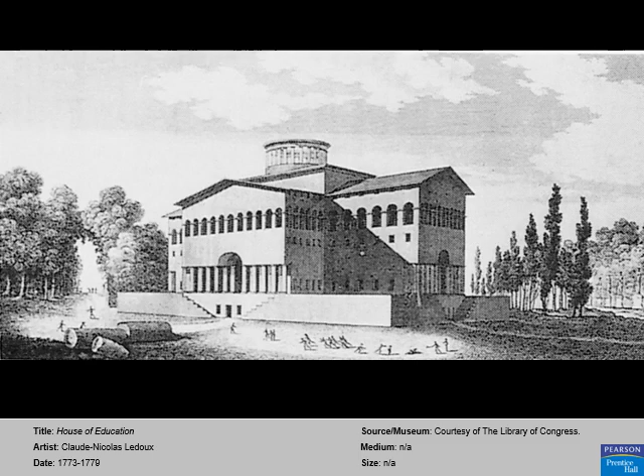This lecture will examine the many facets of our built environment, its evolution from Greek temples and the Anasazi cliff dwellings to skyscrapers and postmodern designs. The look of our buildings and communities depend on two different factors: the landscape characteristics of the local site, which we call the topography, and the forms of our built environment as determined by the available technology. Both are factors that affect the way in which we build structures around us.

So again, you've got topography and technology. Topography is the characteristics of the land, and technology is the materials and the skill available to build things on that land. And both of those things are important to examine as we discuss architecture. Let's start with topography.

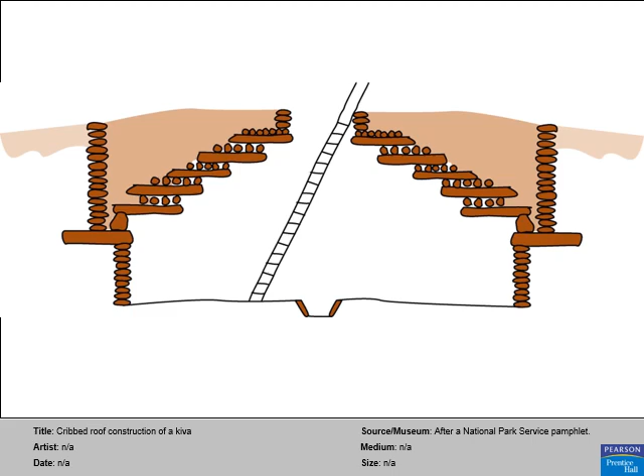While the cliff dwellings are a response to topography of the place, the structure of the kiva roof represents a technological innovation for the Anasazi people. The basic technological challenge faced in architecture is to build walls and put a roof over the space that they enclose, because essentially architecture is building shelter for humans. And there are two basic approaches to building walls with a roof.

Those two basic approaches are the shell system, and the shell system is one in which basic materials provide the structural support and the outside covering of the building. So in the shell system, like a seashell, the walls hold up the roof. That's one of the two basic approaches to building. The other system is a skeleton and skin system, which consists of an interior frame or skeleton which supports an outer covering, or a skin.

And we're going to talk about the shell system and the skeleton and skin system and how they've evolved over the years. In buildings several stories tall, the walls or frame of the lower floors must bear the weight of the upper floors. So again, in the skeleton and skin system versus the shell system, you've got different problems, which we're going to discuss as we move through our discussion of architecture today and the technology of architecture. But again, in buildings that are several stories tall, the walls or frame of the lower floors must bear the weight of the upper floors.

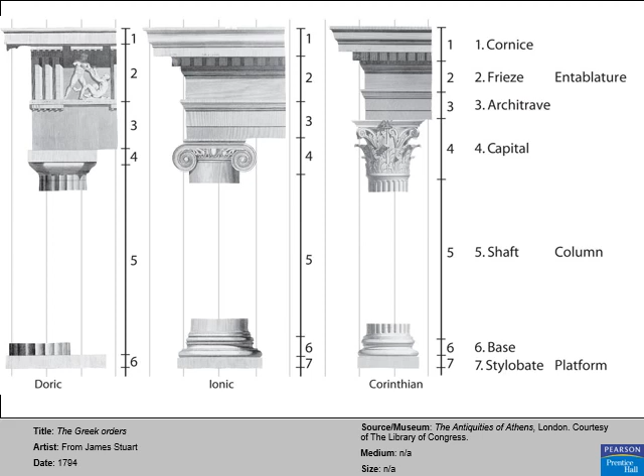In the old days, back 3,000 years ago, Greek priests would hold ceremonies inside. Actually, only in these very small temples, the ceremony and sacrifices would happen on the steps of the temple, and only the priests would be able to enter them to do certain rituals.

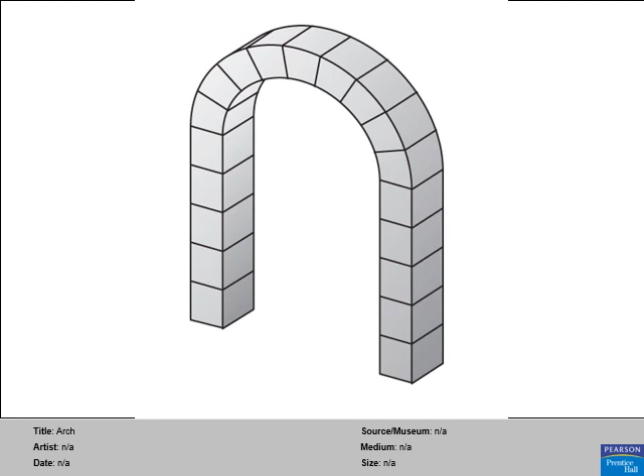And it's still standing, although it was built 2,000 years ago. I was there a couple of Easters ago on holiday with my family, and it is the most breathtaking thing. To think that an ancient civilization made it with no electricity or modern technology, and that not only does it still stand, but people still drive over it, is quite a testament to the ancient Romans' technology and to the strength of building with the arch. So, this is the arch. It's very powerful, right? It can span far greater distances with stone than the post and lintel.

Now, if you take a bunch of arches and stack them behind one another, you get a vault. You get a barrel vault. At top now you see an illustration, a diagram of a barrel vault. A barrel vault is essentially a bunch of arches that have been built behind one another. Below it we see a groin vault or a groined vault. And a groined vault is simply two barrel vaults that intersect at 90-degree angles.

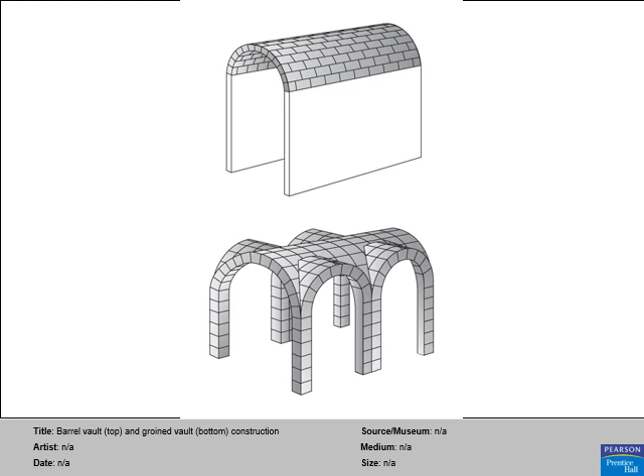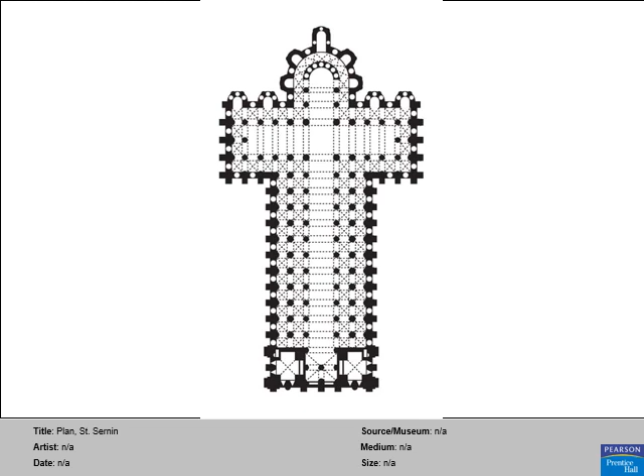But that story of Catholicism becomes part of the design of the architecture for Catholicism. So when you build a Catholic cathedral, you put that crucifix into the very floor plan that it exists.

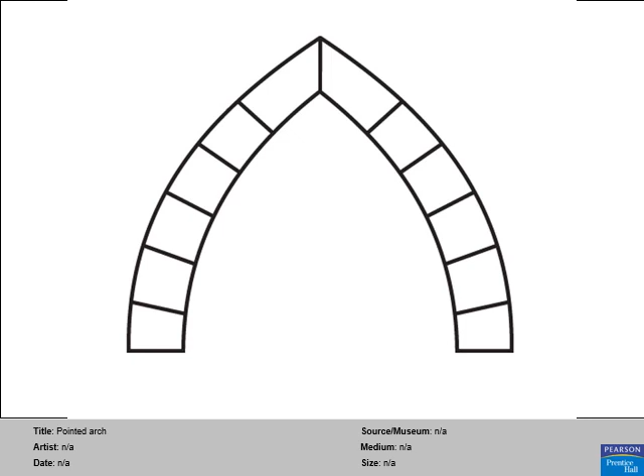The Gothic or pointed arch. Again, the advantage is it spans greater distances than the Roman arch. The most famous of all Gothic cathedrals is the Cathedral of Notre Dame in Paris. It is a Gothic cathedral, and the Gothic cathedral has lots of pointed arches in it.

But in order to aid in the spiritual goal of this beautiful Gothic cathedral, it was the intention of the builders to fill the walls with stained glass full of the narratives of the Old and New Testament to a mostly illiterate congregation below so they could see the life and times of Christ and the apostles, but also to fill the room with this colored light, like James Turrell's sculpture we spoke about in the last lecture, to give it this kind of ethereal, spiritual glow.

So to fill a masonry building, a stone building, with colored light, you need to fill your walls with glass. Well, glass is very beautiful, but glass is not very strong. You can't stack bricks on top of glass. So this Gothic cathedral with its Gothic arches and this high pointed situation, how do we make it so that you could have walls made of glass?

Well, what the Gothic architects and the builders of the Cathedral of Notre Dame discovered was this wonderful term called the flying buttress. And the flying buttress is literally a small tower on the side of a building that has kind of a half an arch that leans in like a helping hand, like an arm, and literally holds the wall up or takes some of the weight off the wall. So the Cathedral of Notre Dame is full of these flying buttresses, these kind of external supports and towers. I'll cut to the next image, which shows the diagram of that.

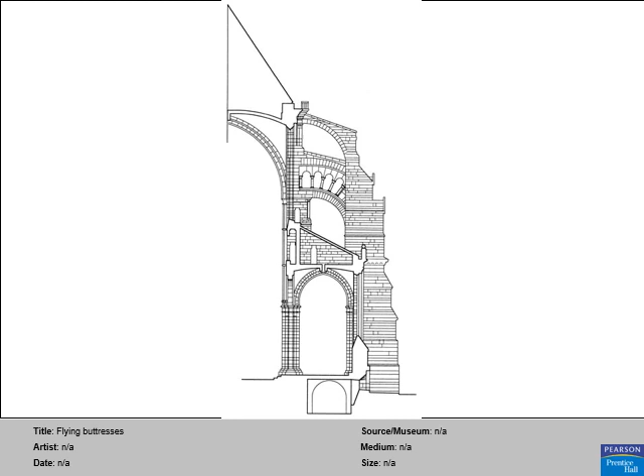So up until then, pretty much everything we've talked about was made out of stone. Stone with some brick and mortar cement, but really stone. And stone for a couple thousand years ruled the built environment. The technology was stone and perfecting stone. Wood was still used for some horizontal beams on some of those huge Greek temples. They would use gigantic wooden beams to span across the tops of some of them. But for the most part, it was all about stone.

Well, in the 19th century, cast iron construction becomes possible, and architecture is determined by the innovations of technology. Stone was there for so long, and then finally during the 19th century, iron, which had been known about for centuries, but was not really readily available until the beginning of the Industrial Revolution, through the invention of the steam engine and other mining technologies and other technologies that let iron and then eventually steel become available.

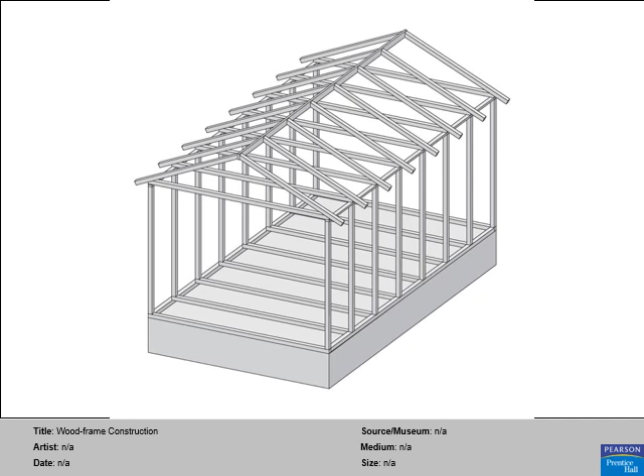We've all been in New Orleans during the rebuilding in a post-Katrina world, and you'll see building companies show up with these pre-made triangles for the trusses, and they'll just kind of stack them up and nail them together really quickly. They're very, very strong structures.

Before the 1920s and 30s, when you wanted to build a house, you went to a sawmill by yourself, and you ordered the lumber you wished to build your home, and you'd say so many 3x8s or so many 6x6s or so many whatever you wanted. Home Depot and lumber yards didn't have standardized uniform building methods until the 1930s. We go to Home Depot now or Lowe's or a lumber yard and we get our pre-made lumber.

But before that, you had to go to a sawmill where they made the lumber from trees and order exactly what you wanted. And different builders had different preferences. That's why a lot of the really old houses in New Orleans have gigantic timbers behind the walls, which are more than strong enough for the construction.

Modern construction tries to deal with an economy of materials and a premium of insulation and energy conservation. We're trying to make houses less expensive to build now because raw materials are so hard to find. 100 and 200 years ago, there were lots more trees around, so some houses have some massive timbers inside of them. Anyway, the truss system is part of balloon frame housing, which is what makes most of our houses stand up. It was used in St. Peter's Basilica because the triangle is such a strong shape.

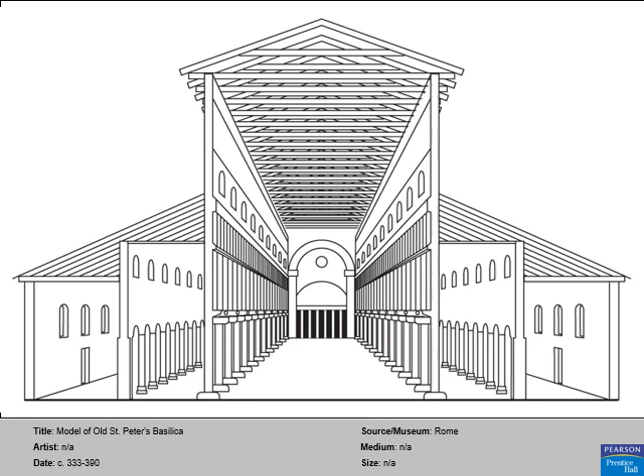Here's the triangular truss, and once you put that inverted triangle into it, it can span greater distances. You'll see these again at construction sites when they're building houses in New Orleans, and they're very strong and very inexpensive to make.

Back to steel and reinforced concrete construction, and we've left the kind of ordinary domestic situation, which is far more important than these magnificent buildings. When you speak about architecture, what percentage of buildings in the world are these fanciful domes and aqueducts? Not too many. They're important art historically, but perhaps the home you're listening to this lecture in right now is more important. There are more regular people living in regular houses than there are people living in these magnificent structures. Nonetheless, let's talk some more about the evolution of architecture.

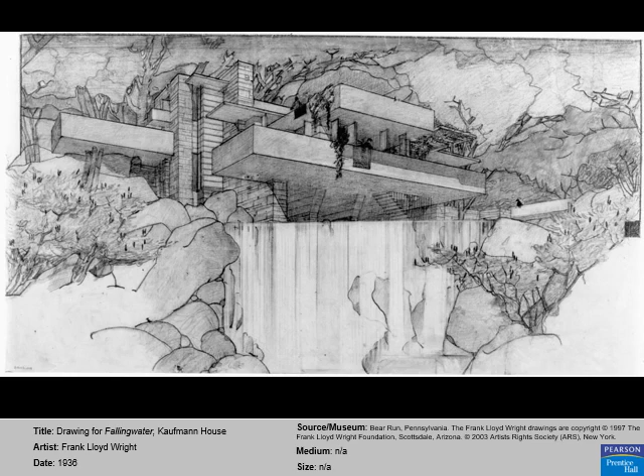Your textbook does another wonderful little works in progress section, and it highlights Frank Lloyd Wright, the American architect and one of the fathers of modern architecture in our country, and his 1935 design for what is arguably the most famous modern house in the world. It's Edgar Kaufmann's Fallingwater House. You see here a kind of concept drawing.

Frank Lloyd Wright was asked to build a house near a waterfall, and he didn't just build one near a waterfall, but rather he built one right over the waterfall that, with this cantilevering of concrete, felt as if it were the waterfall itself.

Again, Frank Lloyd Wright doesn't build houses on the land; he builds houses of the land. The Kaufmann family contracted Wright in 1934 to make this project. The initial drawings didn't appear until the following September, but Wright felt that the architect should first conceive of a building and have it in mind before he begins to make the sketches.

The first drawings, one of which we see here, were done in 2 hours when Kaufmann made a surprise call and said he would like to see the plans. Wright completed several floor plans in that session. As an exterior view from across the stream, we see a remarkable similarity to the finished house.

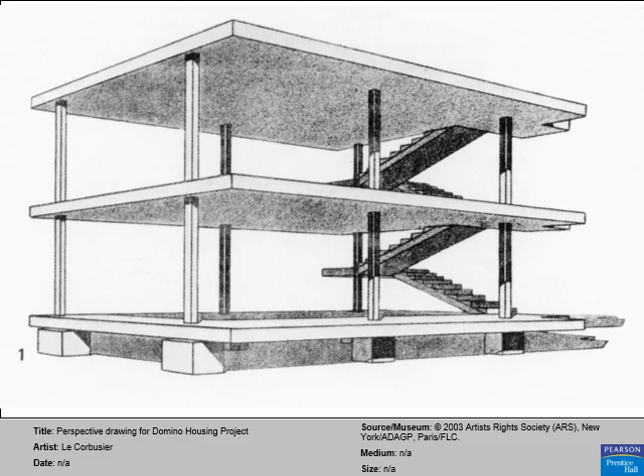Also, this new style of architecture, this very clean and elegant style with very little ornamentation, became known as the international style of architecture, especially after this German pavilion was built in 1929. That's when the phrase was first coined. Our next slide shows us a floor plan of this building.

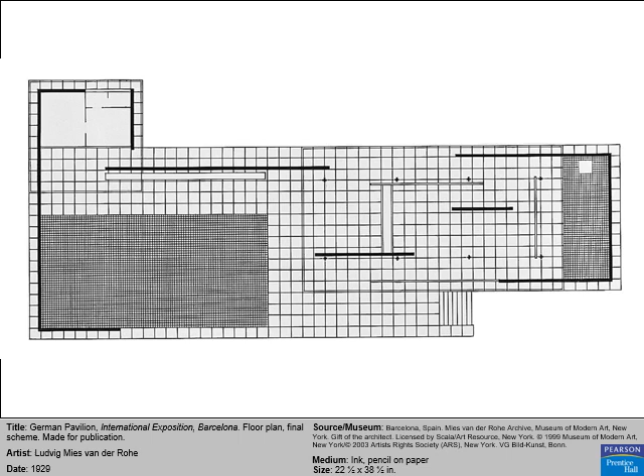This would not have been possible in the shell system where walls held the house up, but rather is possible in the skeleton and skin system because the steel beams hold the roof up.

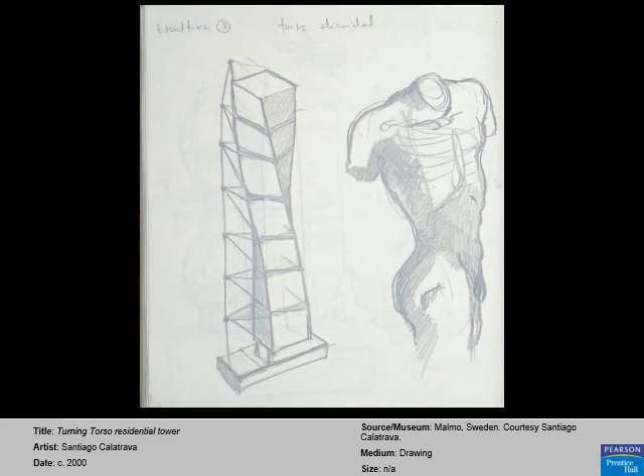A fascinating building made now possible through reinforced concrete, through the skeleton and skin system, and also now through such complicated computer modeling software, which allows us to consider space and make the blueprints for this extremely complicated building.

Rem Koolhaas is an architect who teaches, I think, at Harvard University, and he's been involved in all kinds of building projects, which again utilize these modern building materials and this modern technology.

It's a fascinating building and really seems to introduce a kind of new idea of architecture as it breaks away from that international style and begins to, I don't know what to call this, kind of this new 21st century style of architecture where forms become far more complicated.

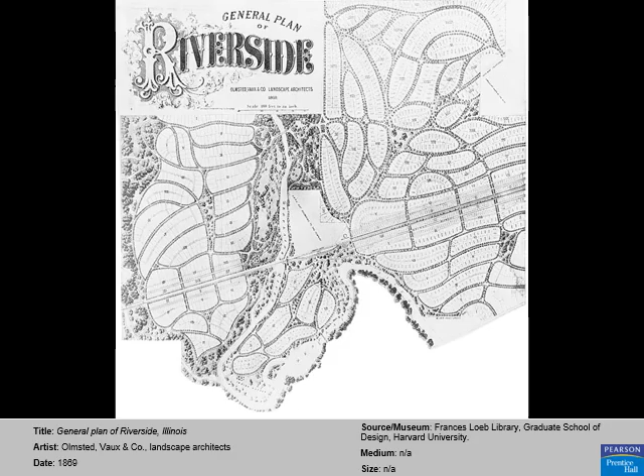The two great consequences of suburban migration were, first, the rise of the automobile as the primary means of transportation, and second, the collapse of the financial base of the urban center itself. In 1930, the city of Los Angeles decided not to spend any more money on mass transit, but instead began to build a giant freeway system.

In 1940, the Pennsylvania Turnpike and the Pasadena Freeway both opened, and America is really a highway nation. We have, without a doubt, the greatest highways of any country in the world. We are an automobile nation. So, that's the story of infrastructure, but let's jump back to the Renaissance quickly.

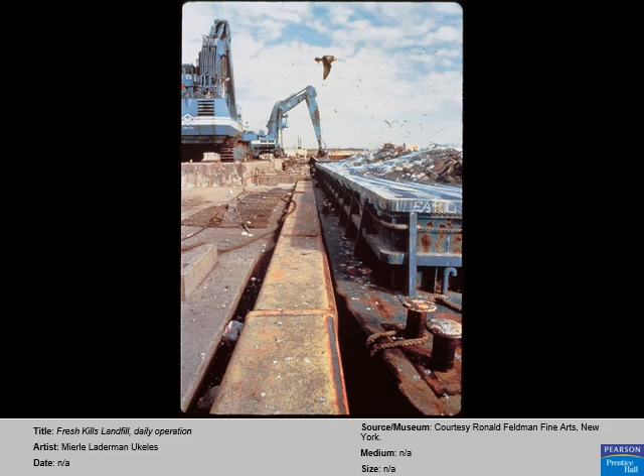There's been a big revival project to put new buildings there, and Daniel Libeskind is the architect who was selected to build what they're calling the Freedom Tower, and designing the whole complex of buildings down at what's called Ground Zero. It's just, again, important to understand the evolution of architecture and how we've come in the built environment from the shell system with simple post and lintel construction onto the skeleton and skin system, which allows us to have glass walls and cast concrete, reinforced concrete floors.

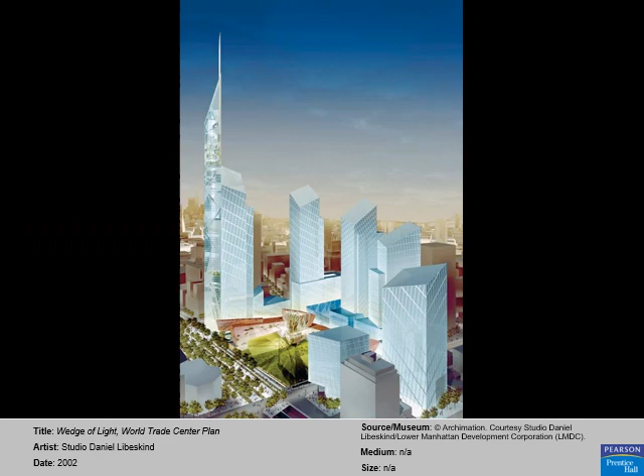Here's the final image in this chapter, well, actually we have one more. This is the proposed new World Trade Center complex, World Trade Center plan, which will include the Freedom Tower, and it's been modified many times, unfortunately, by city planners and other agencies that have been involved, including the Homeland Security Department, because they don't want it to be so easily vulnerable to another terrorist attack.

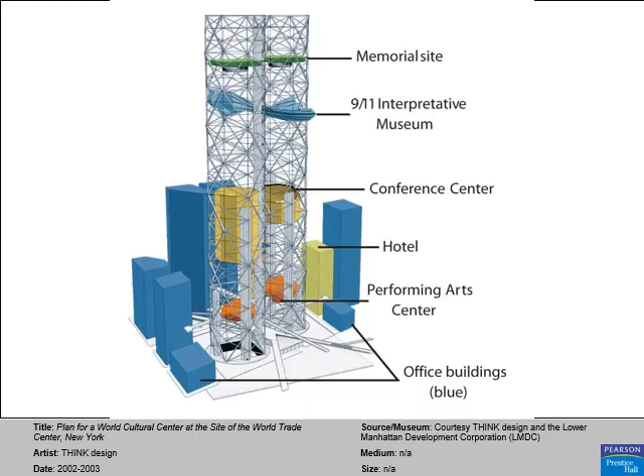Ziggurats were something that the Sumerians used. Kivas were those in the Colorado cliffs. The shell system and skeleton and skin system we've talked about at great length. Tensile strength is, again, how far you can span a post, a lintel between two posts. Load bearing means just that, how much weight you can put on something.

The post and lintel, we saw the Lion Gate at Mycenae. The arch, we saw the Pont du Gard aqueduct. The post and lintel, again, the Lion Gate at Mycenae is a great example of that. The lintel is the distance you can span between posts. The lintel is burdened by its tensile strength.

The arch comes out of the evolution of the post and lintel, and the arch is essentially two posts that curve to each other until they meet at a keystone, and the arch overcomes the limitations of tensile strength in stone, in a stone lintel especially. The dome gives you an even greater open space, and the dome is essentially an arch that's been rotated on its z-axis. A great image of the arch would be the Pont du Gard aqueduct. The dome, we saw the Pantheon, which also introduces the use of cement.